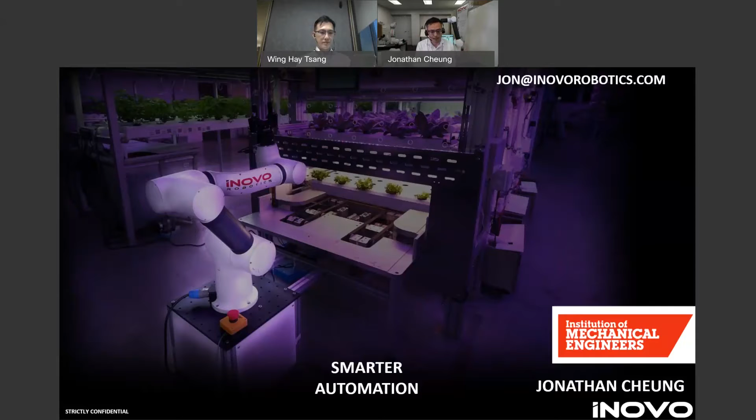But before we go into the details of Inovo, I'd like to share a little bit of my professional background and where it all began for me, to give you a bit of perspective on the Inovo journey and how we got to where we are now, and some of the exciting projects I've professionally been involved with.

To begin with, my professional background is as a mechanical engineer. I had my MEng in the UK, and I started my career in robotics in the UK for a commercial but defence organisation called QinetiQ. Right from my early career days, I've heavily been involved with automation systems, robotics, robot arms, manipulators, and remote control vehicles. So here you see some examples of some robotic and remote vehicles.

The one you see on the bottom right is a remotely operated JCB digger for unexploded bombs, effectively. And the image on the top right is a smaller bomb disposal research vehicle developed for the company, QinetiQ, which is a UK-based defence company.

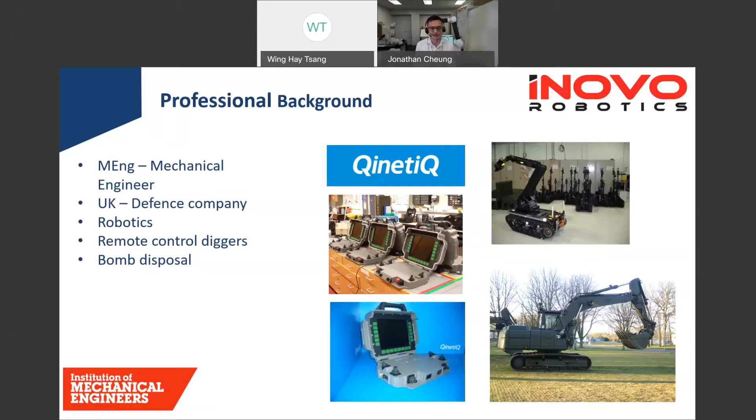And so that's really where professionally my career started, and moving on from robotics in bomb disposal, I spent a number of years working in transmissions, particularly in hybrid electric transmissions for tracked vehicles. So here you see on the right, a circa 30-ton military tracked vehicle, and I was involved in the development of the electric transmission of this for a number of years as well.

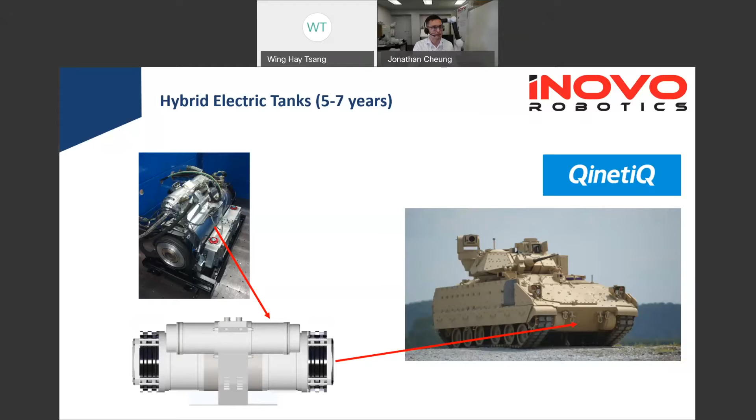In my early days prior to developing Innovo, so this was in my prior life, moving a little bit further on in my professional world, I did a number of projects for the Home Office, for Defence and National Security in the UK, where I developed a very novel scene management barrier. It's a police barrier, a foldable trailer, which can act as a police movable shield, and the video you see here is in the UK.

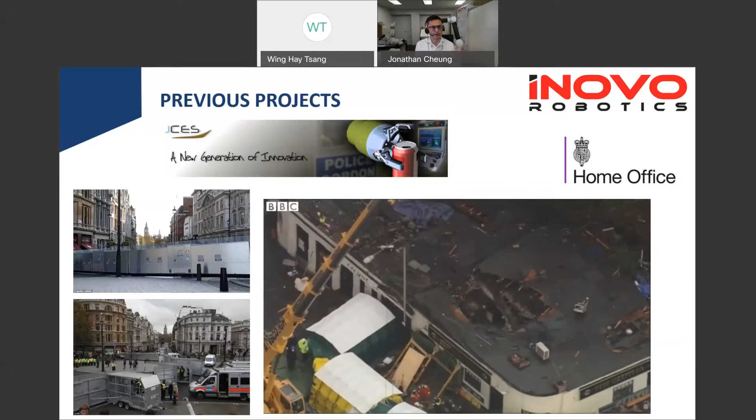It's actually in Glasgow, where a helicopter unfortunately crash landed on top of a building, and as you can see, there's a perimeter of police barriers to protect the site, to keep privacy in that environment. I'm very proud to have created a system which is being used so heavily and publicly in the security industry.

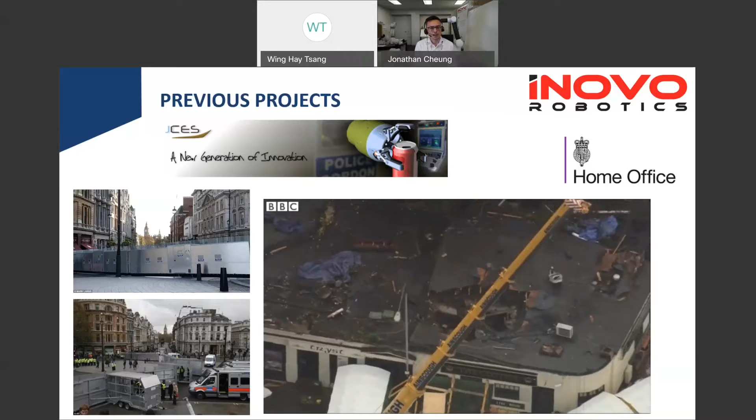So moving on into some later years within the robotics industry, one of my roles was as an engineering consultant for developing the UK's next generation bomb disposal vehicle. This is the vehicle currently being used in the UK by the UK police, and it is heavily used to protect lives, to defuse unwanted explosive ordnance effectively. So the kind of defense systems I've been involved with, and very proud to be involved with, are in the defense environment, and they actively save lives.

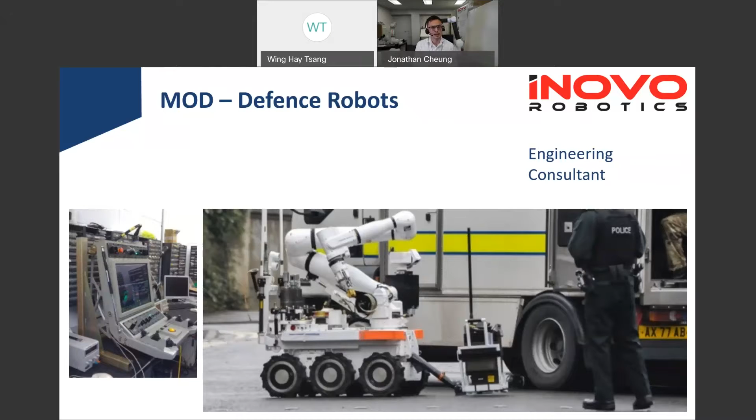So it was in this company that's actually the seedling of the idea of where Inovo would be born. This was the company in 2009 that I met my co-founder, Henry Wood, and we worked together very successfully in this company to deliver this very advanced, very state-of-the-art military vehicle to very exacting standards. And it is where we first worked together and first started solving real problems together.

Myself and my co-founder Henry, we embarked on some future projects together as consultants. So this very interesting project is actually a ground vehicle project.

It was effectively for the Ministry of Defence, but the aim was to create a fundamentally more explosive-proof vehicle. A big problem within the military is military vehicles have to withstand a lot of explosions and abuse, so what we did is we created a novel suspension system which would be fundamentally more robust from explosions than a conventional system.

So this is a very exciting project, and I'm playing a very short video now where this vehicle is being tested in a military site in the UK, and the test environment was very interesting.

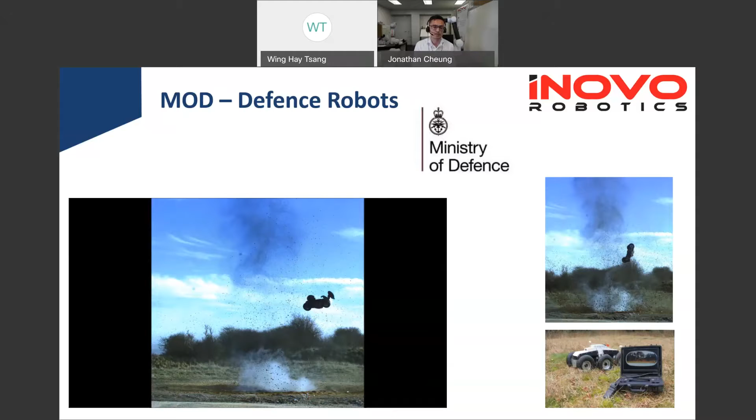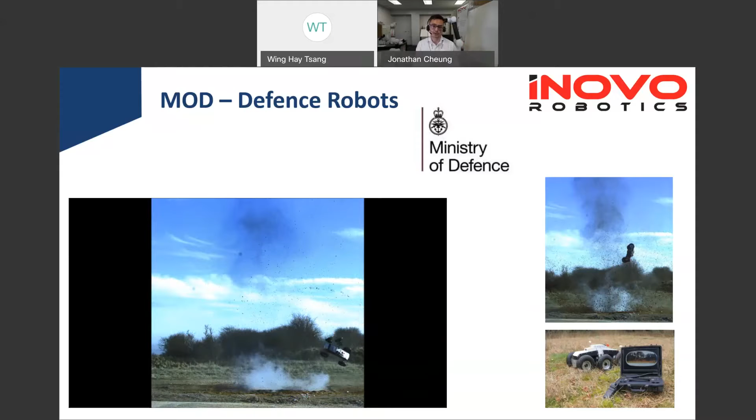We were required to progressively apply more and more explosions or explosives to it, to try to test and validate the increase in performance to the novel suspension system. This was a project funded by the Ministry of Defence as an R&D project, and was very rewarding.

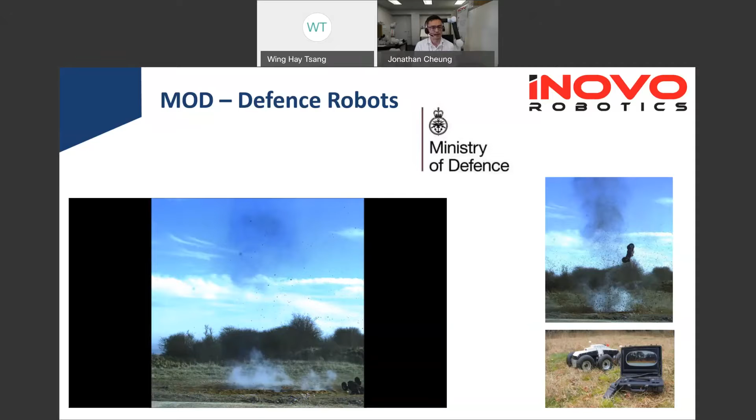After this project, we actually patented this novel suspension system, and we have maintained that patent. So that's a very brief background in terms of our journey before the start of Inovo. Inovo was born with myself and Henry Wood, my co-founder, with an image of him displayed there.

We decided that what we wanted to do is bring our level of expertise solving very novel, high-end problems, our engineering background, to solve a problem which was much more widely seen as an industrial problem, as opposed to purely within security or military, where we felt the market is quite contained or quite small in comparison. So in 2016 we started a new company called Inovo Robotics, and this is where our journey started.

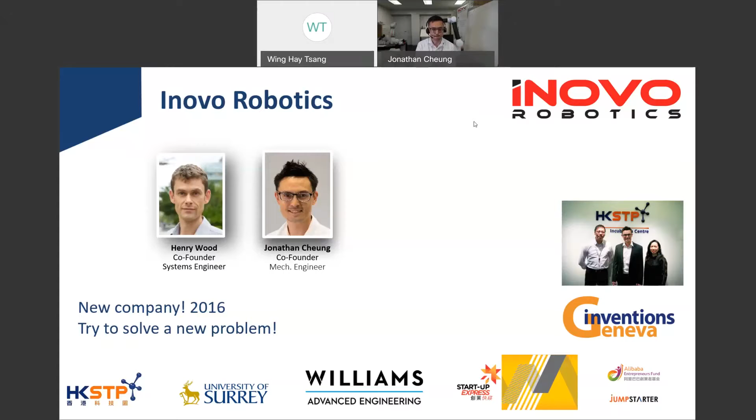I mentioned briefly about the market that Inovo is solving, and what we realized when we looked at the manufacturing market is it's incredibly manual. Every product that we make, at least somewhere down the line, there is somebody putting it together. Whether it be packaging, assembly, picking, loading CNC machines, or loading injection molding machines and hoppers, somewhere along the process there are lots and lots of people where there is a lot of inefficiency.

Globally, manufacturing as an industry probably accounts for 2 billion people, and the greatest problem within manufacturing is this huge dependency on labor. So what we are aiming to solve is to create an automation system which is smarter, more flexible, more adaptive, and affordable, to help lots of different businesses automate quicker and smarter. That is really where we pivoted our journey and took our step into Inovo Robotics.

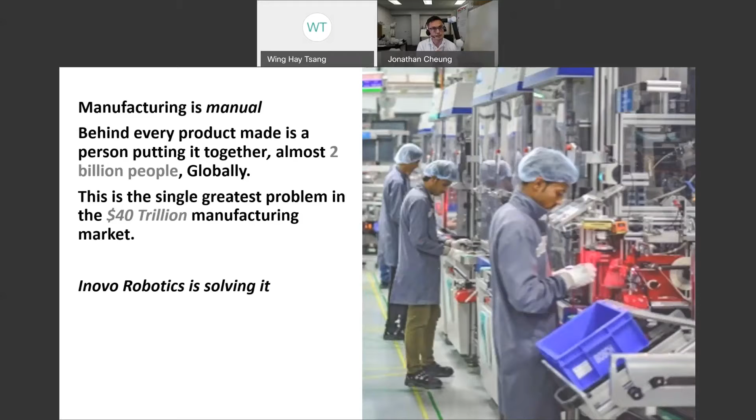Inovo Robotics was founded in 2016 in the UK and in Hong Kong. We took the very interesting step to start the company in two places, which is quite unconventional, and we did it for a number of reasons. Firstly, we're quite ambitious, and we wanted to maximize our opportunity in developing a company by looking at the best places that would give us the traction, the market opportunity, the supply chain management, and also the talent to build our business.

We decided that, because we have worked extensively together, we were able to manage an engineering team very well, and we have deep technical knowledge. My background is in mechanical engineering and product design and development manufacturing, and Henry's background is in electronics and software, so our skill sets complement each other very well.

We looked at the different regions and markets to evaluate where the pros and cons would be if we were to start a business, where in the world would be the most sensible place, and we settled upon UK and Hong Kong.

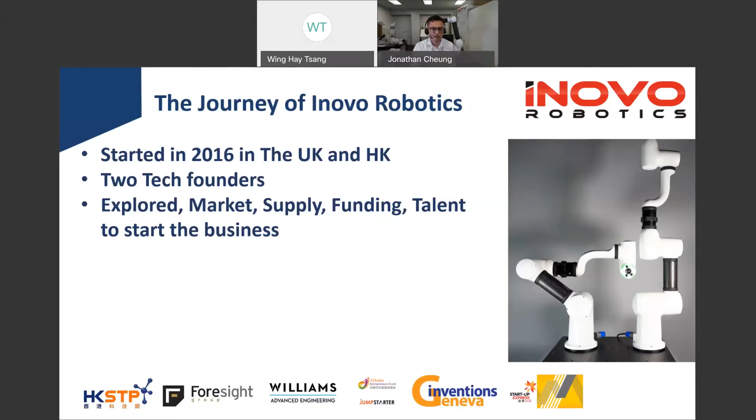So now I'm just going to jump into a short video to give a different starting flavor to what Inovo is about. So I hope this helps.

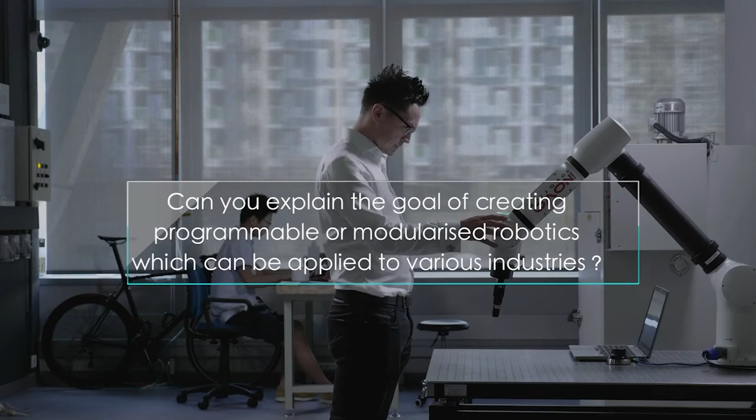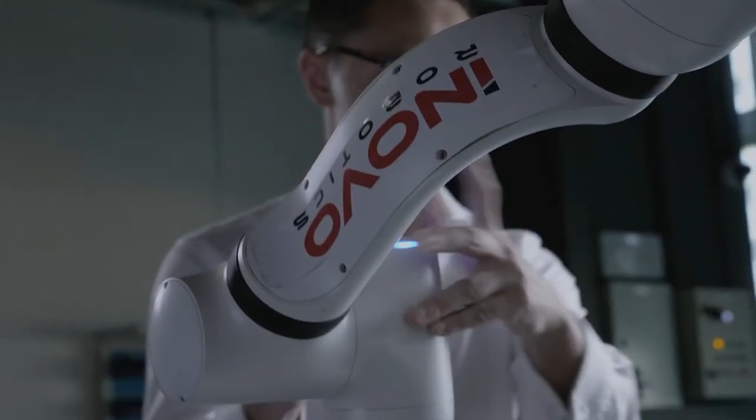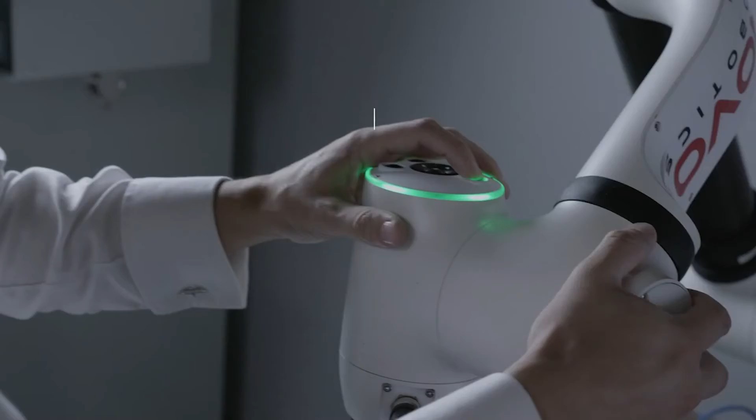The real goal of Inovo Robotics is to make democratized robotics, as we call it. What we're trying to do is give small to medium businesses across many different verticals the ability to automate and industrialize their everyday processes. Traditionally, big companies have been able to use robots and industrial automation, but small businesses have been unable to really benefit from it. So we want to create easy to use, flexible tools which will help them automate their everyday activities.

So the supply chain in the East, affordable low-cost manufacturing, being very close to our manufacturers helps us really manage the quality of our products, and to support our suppliers and subcontractors to get them to bring us exacting quality.

Exacting quality. So the market is the next area. Our market is really aimed at small to medium businesses where there is a high labor rate, but an obvious need to increase automation. Traditionally that has meant our market has been in high labor rate countries - Western Europe, the US, and also some Asian countries such as Japan and Korea. Those are the real countries we're targeting first.

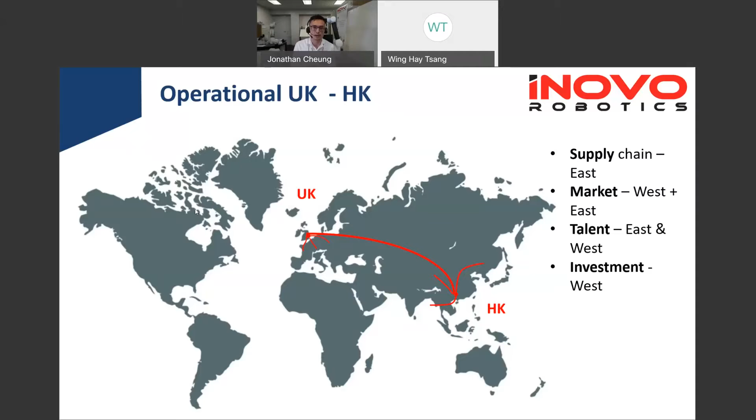So now I'd like to delve into a little bit of technical detail. Obviously this is an IMechE talk, and all our members are mechanical engineers, so I'd like to delve a bit more into the mechanical bits and pieces.

One area of real interest within the robotics part is the structural element. Robotics or manipulators are a quite specific type of structural problem - effectively we're always talking about cantilevers. These are cantilevered beams, and so our structures always need to be optimized for strength and stiffness.

The main reason, for obvious reasons, is that the more weight you have hanging out in the cantilever, the stronger your motors need to be further down the arm. So mass optimization is always a very important factor in robotics. The lighter and stiffer you can make a structure, the less power you'll use, and acceleration and deceleration times will also be increased, and stopping distances decreased. So there's always a real drive to increase stiffness, reduce weight, and carbon fibers are always a preferred material.

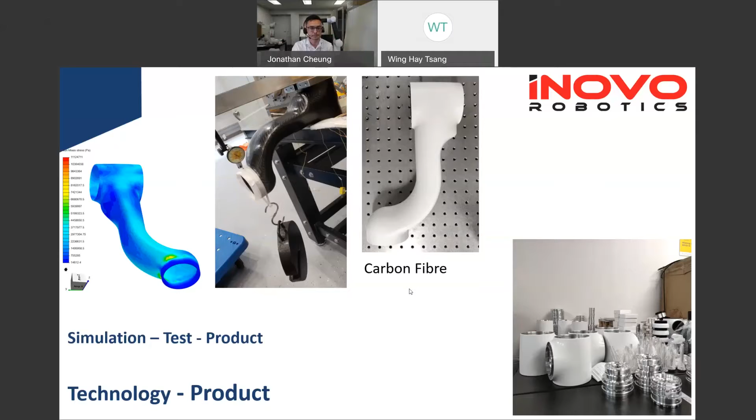So as a very brief example, on the bottom right, we have some machine parts - lots of different machine parts and also some castings. So we have our casting suppliers, our CNC, our lathe suppliers, and lots of different manufacturing methods that we use within the product. So those are the piece parts.

There's also within our team, within Innovo, we have a number of patents. We obviously have a modular robotic system, which I'll demonstrate in a little while. But what we have is a number of different mechanical physical patents.

The first patent that we have is within our coupling mechanism. So we've created a modular system where we are unwilling to compromise on the stiffness, the rigidity, and the repeatability that is required within an industrial automation system. This level of performance is not available within any commercially available coupling mechanisms, so we've created our own.

It's a quick connect coupling which enables us to have extreme amounts of rigidity, repeatability, but also to maintain the level of performance that is required in an industrial robot.

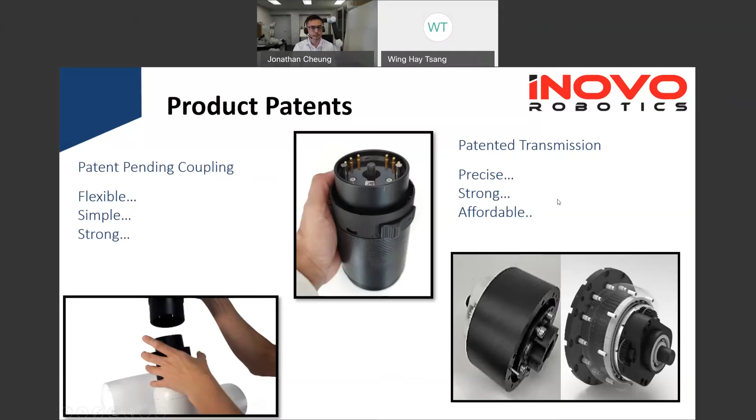From a collaboration point of view, from the UK and in Hong Kong, our company has extremely deep levels of technical knowledge and capability in all areas of engineering. We develop our own motors, we develop our own drivers, we develop all our own embedded software for the controllers. We also do a high-level software, which is our graphical user interface, and we also develop almost all of our piece parts ourselves.

So we have a very deep technical knowledge in a lot of different areas, and we've also spent a lot of time with our suppliers in China and also the whole of South Asia region, where we've worked very closely with them in order to optimize our system, to get the level of performance that we require, the level of fundamental cost, and the level of control over our quality. It's really important, when developing a very sophisticated product like this, to have very good fundamental controls over your core elements, meaning you have a deep understanding and are able to optimize and get the best product, which is one of Innovo's greatest strengths.

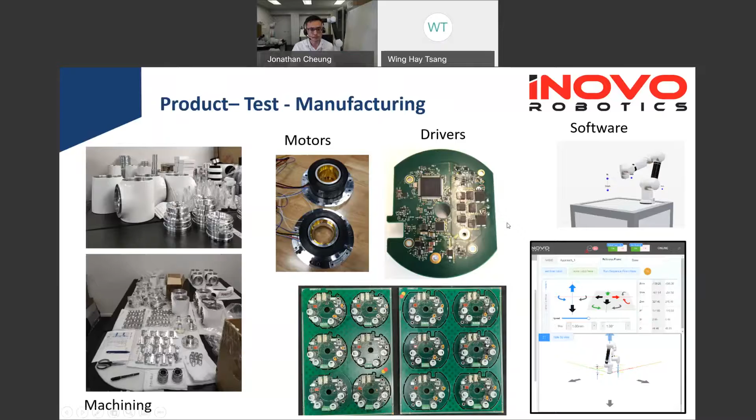Now I'd like to briefly show another short video. This video explains really how the system can be used and why we have a different level of flexibility and automation compared to other robotic systems that you would see.

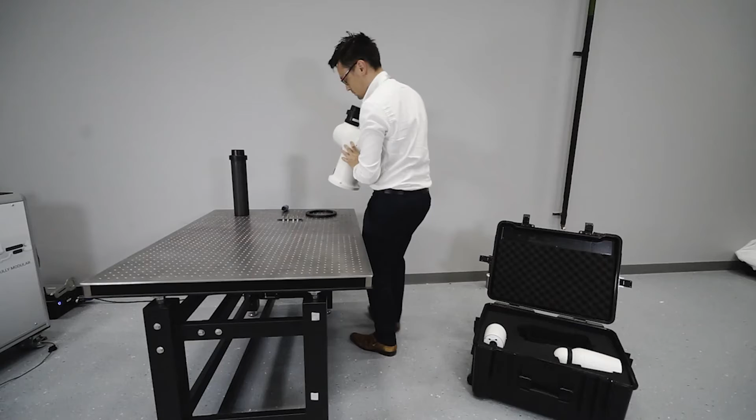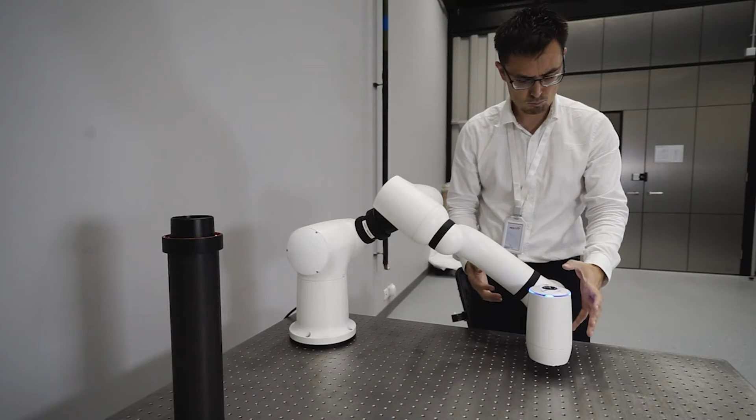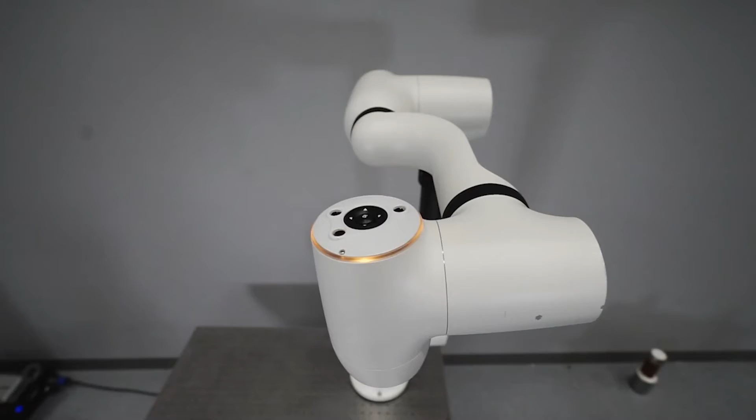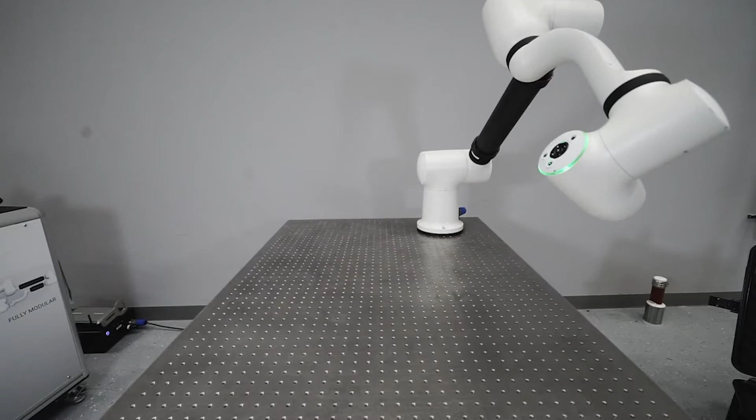So what you see here is teach and repeat, and we have a very simple to use teach and repeat system. But when the requirements change and the system requires a greater reach or a change in payload, our modular system is able to be flexible enough to adapt to all different types of automation environments. So the user and customers are no longer constrained to a certain size. They're not bound by a certain way of doing something. We have the most flexible tool in the market.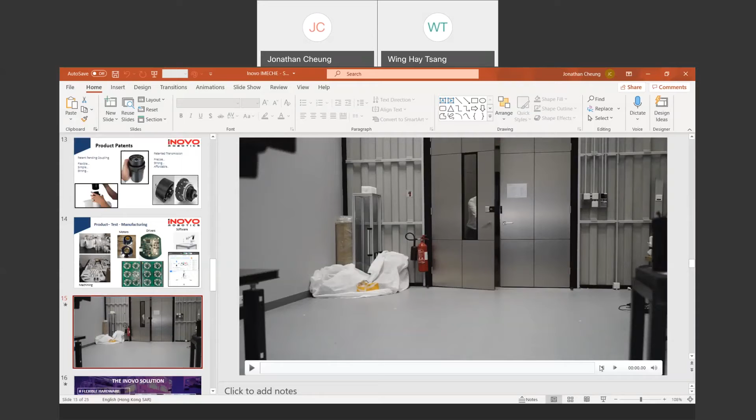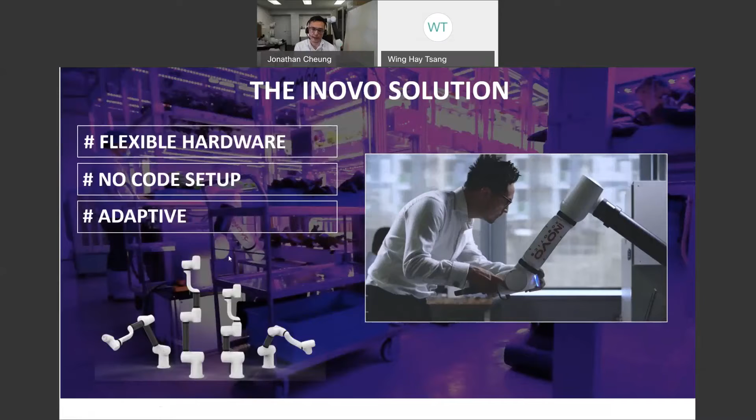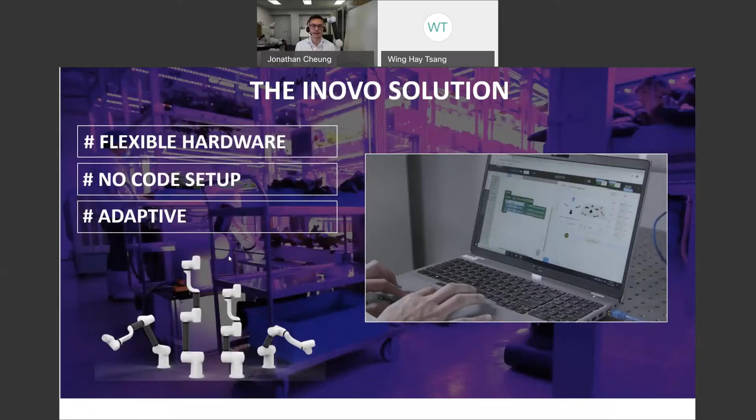So, yeah, so the Inovo solution. What we have is flexible hardware. Our software is no-code, so we use a very simple user interface, which I'll briefly show at the end, and it's extremely adaptive. What that means is we bring a tool like no other to the market.

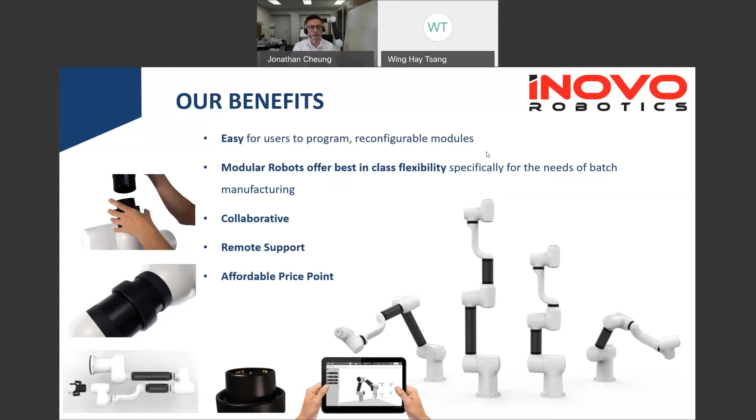So our benefits: we're very easy to use, completely flexible. We're a collaborative robot, meaning they're safe to work around people. This is very different from an industrial robot, where if a person was operating near it and got hit, the robot would never slow down or detect that person was there. Our robot works as a collaborative tool around people, so it's safe, extremely flexible, and extremely easy to use. These are our main advantages.

So how does modularity really compare to other systems? If you take this case example on screen, we have our robot on the left with 3 different configurations labeled 10 kilos, 5 kilos, and 3 kilos. That is all one robot. We change the link sections and lengths to get that level of reach and payload trade-off that would normally be seen across 3 different robots.

So what we say to customers worried about exactly which system to use, or which robot will be most reusable once a batch production run is complete, is: give yourself the most flexibility, because you don't know what project will come later, in 6 months or a few months time. You don't necessarily need to buy automation just for this project, but invest in automation because your automation is the future. That's really how we try to position our product.

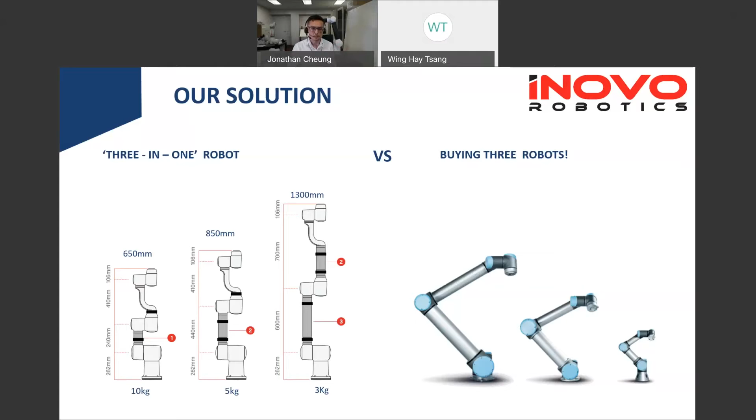So the title of this webinar is Smarter Automation. We have a lot of technology already in our product, but we're also bringing a step improvement to the platform as well. So we very much see our product as a platform product.

We have lots of different interfaces, and we can connect to our system in many different ways. We can use third-party tools, sensors, components. We have a very open architecture from a software and electrical point of view, and so we see our offering as something that can automate today, but also take our customers on an automation journey where they're able to add value later and automate more and different things.

One thing we're developing in the background now is our connected system. All our robots can be connected remotely, so given the right permissions, we can access any robot in the world with a 4G or 5G connection. That means we can remotely log in to do maintenance, predictive maintenance, and adaptive support, seeing where there will be problems and using that data to help improve or optimize processes. We very much see this as a platform of the future.

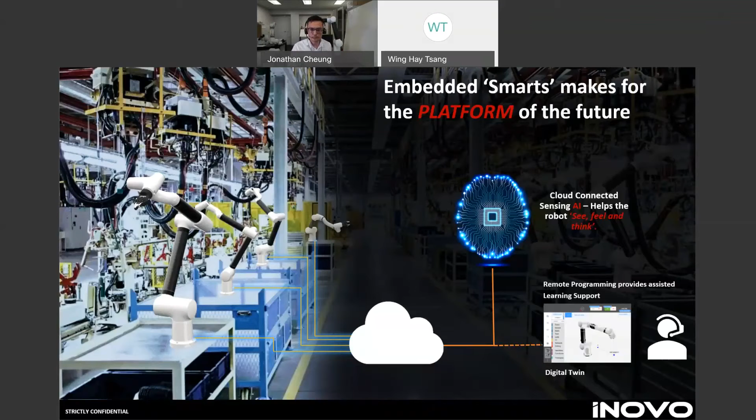Our company, as I've said, is 4 to 5 years old, 4.5 years old. We have many different applications within the pipeline of our business. Because of our flexibility and smart connections, we have lots of different industries asking us to help them automate. So here are a few examples of our applications.

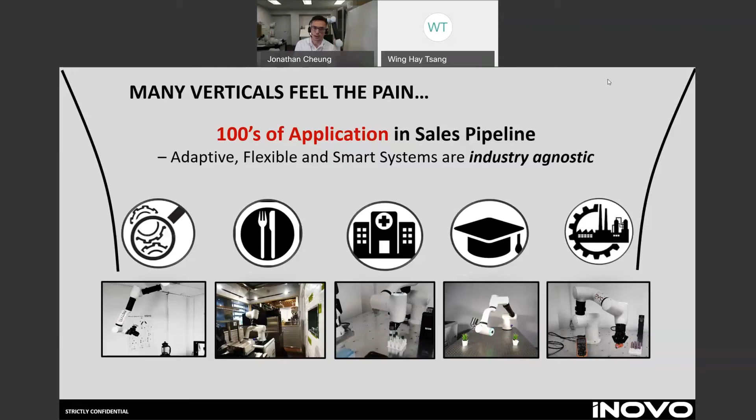On the left we have some vision systems, and we're working with a company in Sweden on a photogrammetry system. We already have our system within a restaurant right here in Hong Kong. We're also working on sample inspection and sample taking of COVID-19 samples, as well as a number of other applications within education, testing, and food processing. Lots of different applications.

Here's an interesting one we're working on alongside Williams Advanced Engineering, for battery testing for an EV vehicle. One thing you really don't want to get wrong is putting a bad cell into a battery pack, so the most reliable way of doing that is to generate an automation system to handle it. We've supported Williams Advanced Engineering to do exactly that.

We've sped up a short video here showing us picking up battery cells, putting them into a little tester, validating that it's okay with separate systems, and then placing them back in. This is a short example of where monotonous, repetitive tasks can be easily automated. This level of programming was done in under 20 minutes, and these battery builds could go on for 24 hours a day.

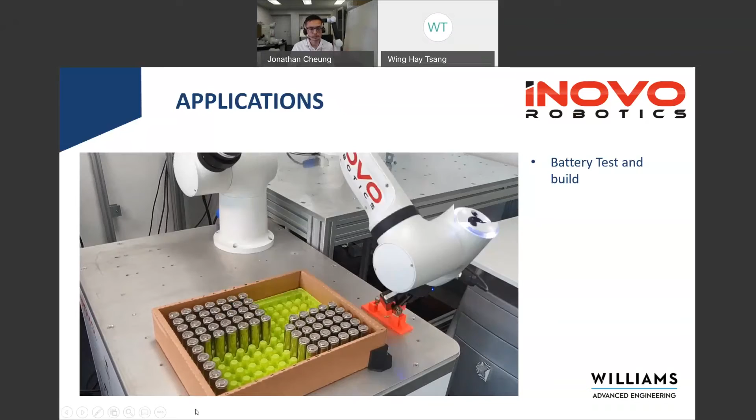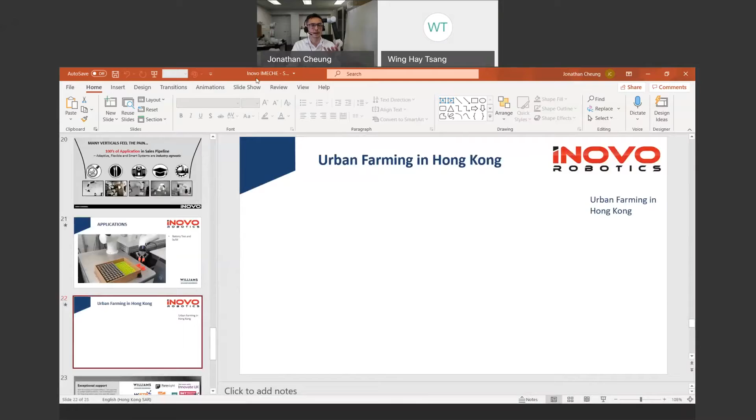So I'm just going to jump into another very short video. This is another application where we have an application within Hong Kong, so it's of interest, and this is a demonstration that we've carried out in an urban farm within Hong Kong.

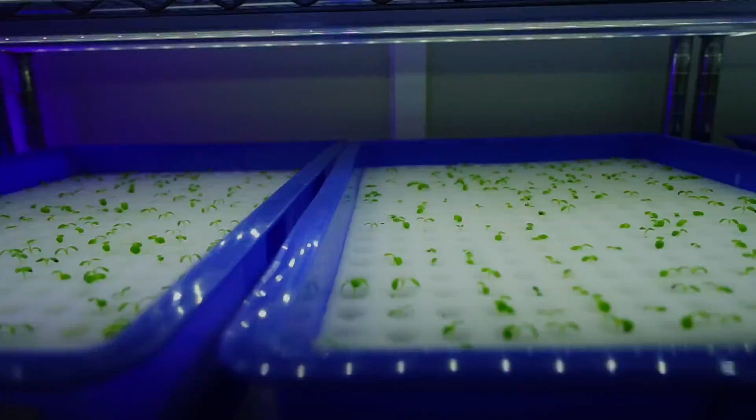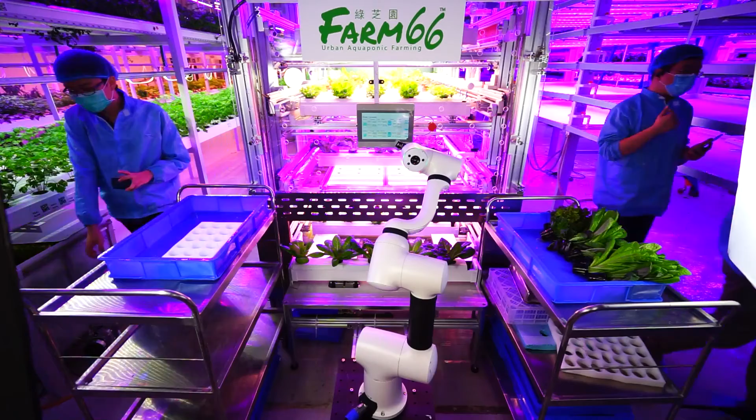This is one of the most advanced urban farms that I know of, and they are pushing the boundaries of urban farming. We're supporting them with our robotic system, which is super flexible and can do many different tasks to help automate and optimize food production. What you see here is our robot system loading salad seedlings into an urban farm, and on the right it takes out those salads and harvests them after they've grown for 28 days, I believe.

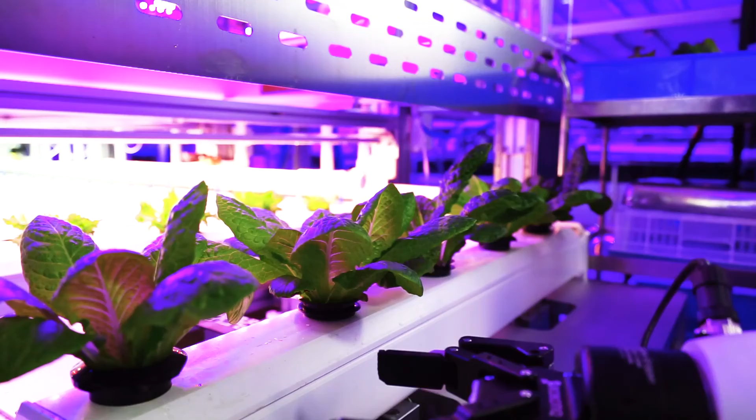This is an example where we have an extremely flexible system, and we're able to come in and fill the gap between manual labour and automation systems to increase efficiency and productivity.

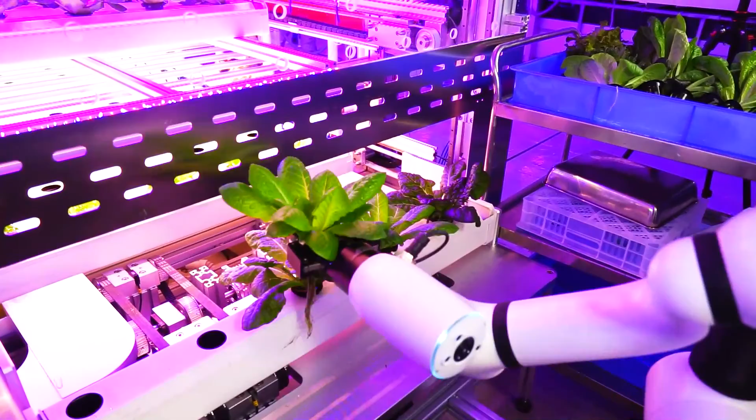So here you see some of the outputs of the salads, which I highly recommend. They're available in Pacific Coffee, Coffee Academics, City Super. They are very good organic salads, and I recommend them.

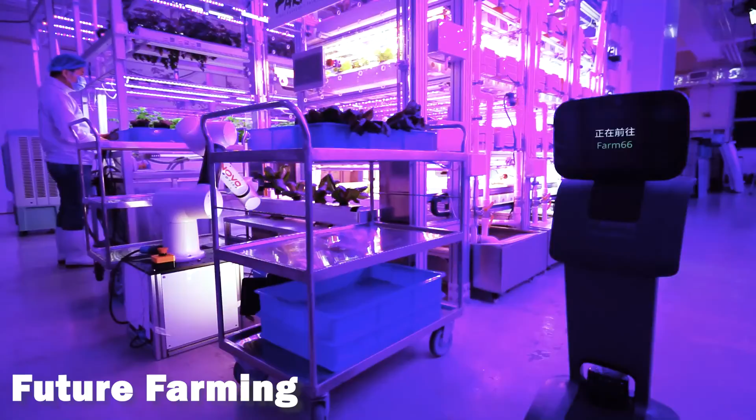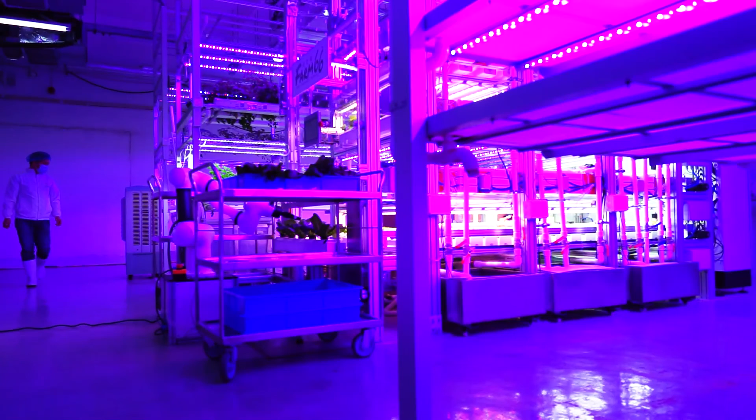The advantage of robotics and automation is that you are able to operate 24 hours a day and keep the productivity going, and that's where the advantages lie. The company is called Farm 66.

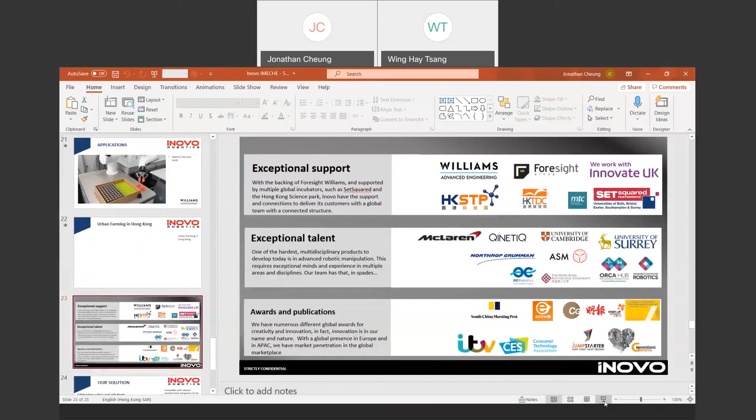I mentioned earlier how I was going to talk a little bit about talent within our company, within the UK and Hong Kong. It's something that I'm very proud of, the team that we've created here. We have exceptional talent, and you'll see very familiar names in these boxes, where you have McLaren and ASM, which is much more familiar within Hong Kong.

We also have Cambridge. We have Williams, the Formula One team, who are our backers, and so we have a very deep level of technical capability. You really need it for such a complex system where you have to integrate very complex areas of engineering very tightly, from structural performance to control systems to high-end user interfaces.

To productionization - there are lots of different facets within the robot arm, which makes the product very multidisciplinary. The one thing I've always experienced in robotics is that if you don't perform well in any of those areas, it really shows, because a good robot system has to combine all those elements in a very good way.

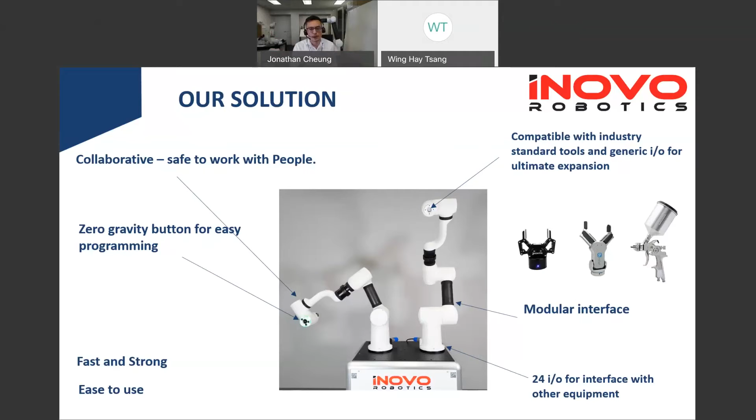That's enough of me speaking. Now what I'd like to do is give a brief demonstration of our robot system, and then we'll open the floor to questions. I think the next thing is I'll do a small demonstration of a robot system behind me.

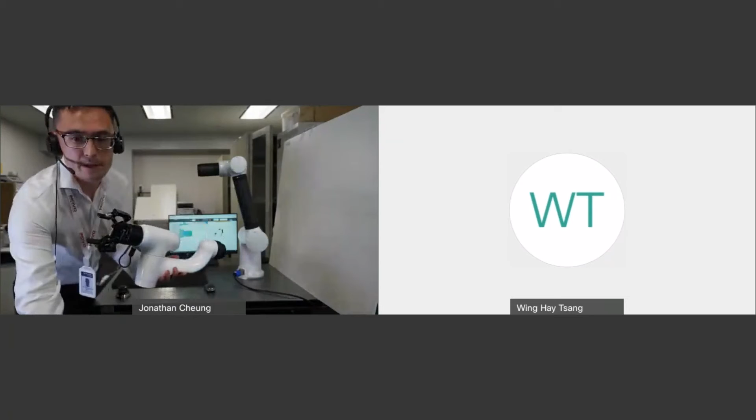So I hope everyone can see, at least see a little bit of what's going on. What I have here is a part of the robot arm.

This is the carbon fiber element that I mentioned before, and what we have here is part of our module. We have two joints within here, and we break down our joints into basically joints of pairs. So this is what we call our joint 5 and 6. Our joints 3 and 4 are here, and 1 and 2 are here.

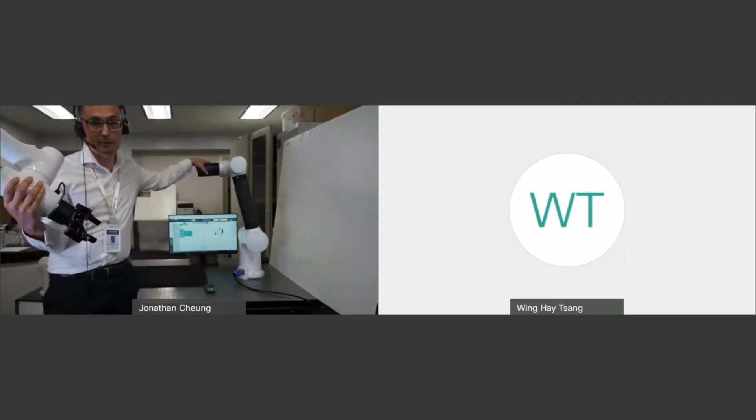What you see is they are separated with these black elements, which are our flexible link tubes or stiff link tubes, of varying lengths. What I'm going to do is just show how everything goes together. I've got just a small link tube section here because I've chosen to have a medium tube here, and I'll have a small link tube here.

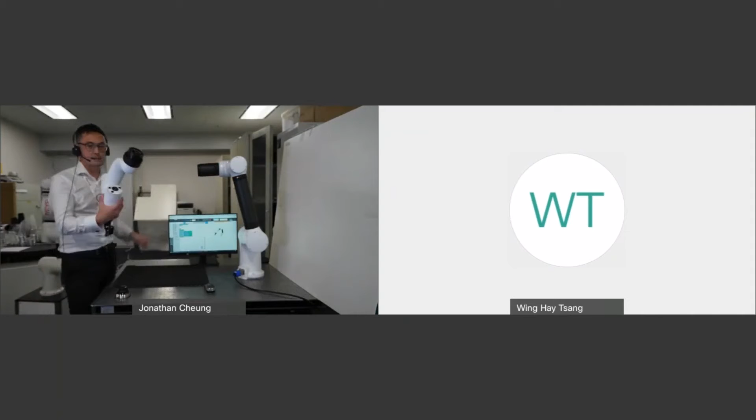So I've already set that up. All I'm going to do is take that link section, and all we need to do really is put it into position, and then move the flexible coupling element.

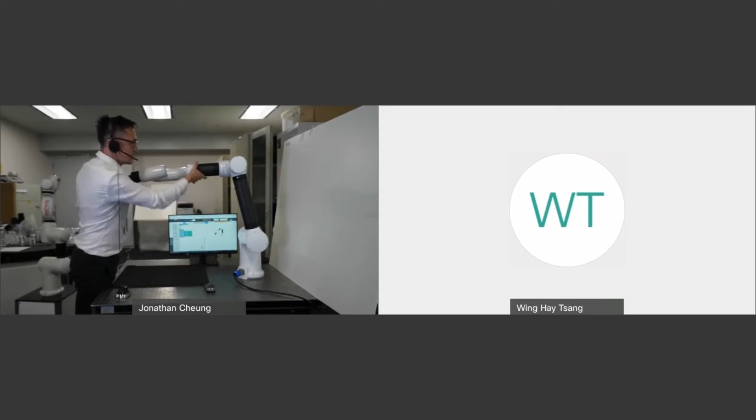We have this locking collar arrangement, which is one of our patented elements. So what you have here is a lock system. Now we've got a latch here, which means it won't undo, which is obviously very important to not have to worry about it coming loose.

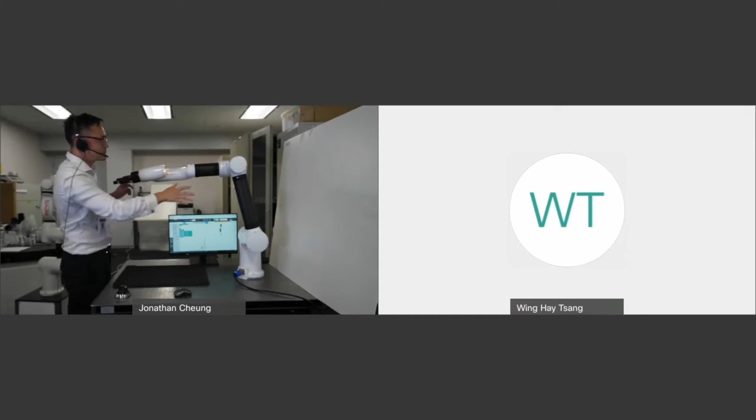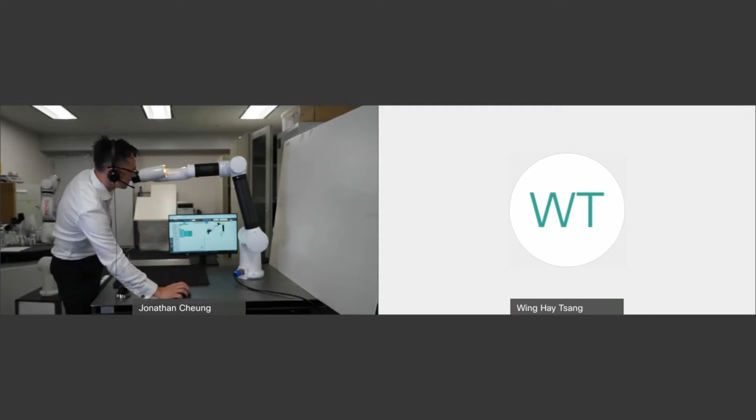I'll just press the power button again. So what happens now is the yellow light is flashing, so this is now picking out the configuration. It's very difficult to see here, and I must apologize on the display, but as you can see, the user interface will automatically update.

So what that means is our system knows what configuration it's in. It's plug and play. We don't need to calibrate. It's all pre-calibrated. Everything is plug and play, like Lego blocks. And then what we would do is enable the system, and now the system has gone green, and the system's ready to go.

So the system is ready to go, and there's a few things that we do in order to make it really good and simple to use for our users. One of the ways is to really allow our users to operate it and use it in a really intuitive, flexible way.

So the first way that we do that is we have what we call a zero gravity button. We'll press this button - notice this has gone blue - and we can just move the arm around as if it's in zero gravity. So what we do is move that to a position.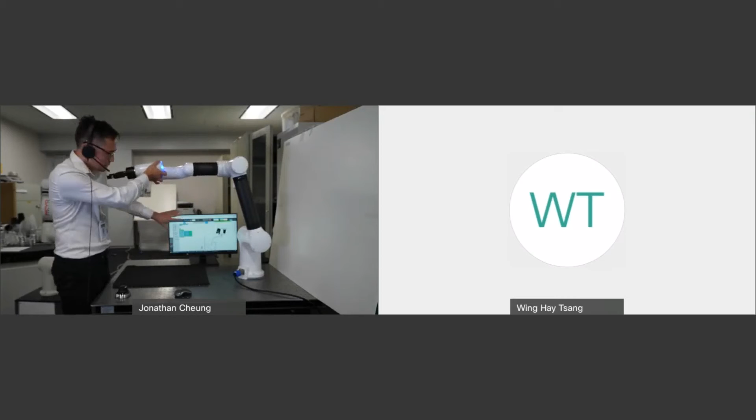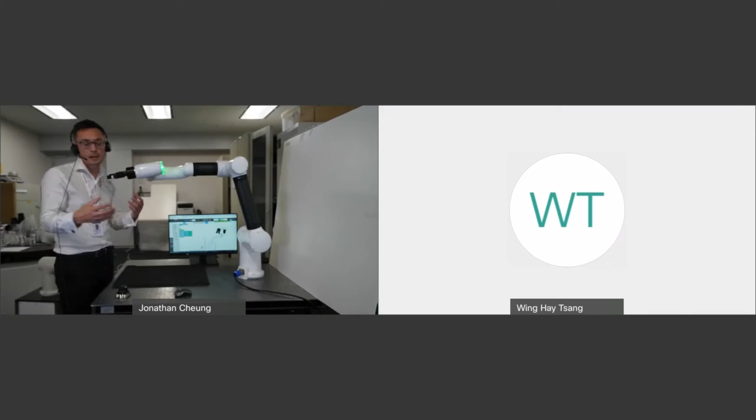We'd record certain positions, and then in our flow diagram user interface, we would just record those steps. So it's as simple as move it here, record, move it here, record, and then we build on that program. We elaborate it however much is possible using logic, and very simply you're able to build up automation systems.

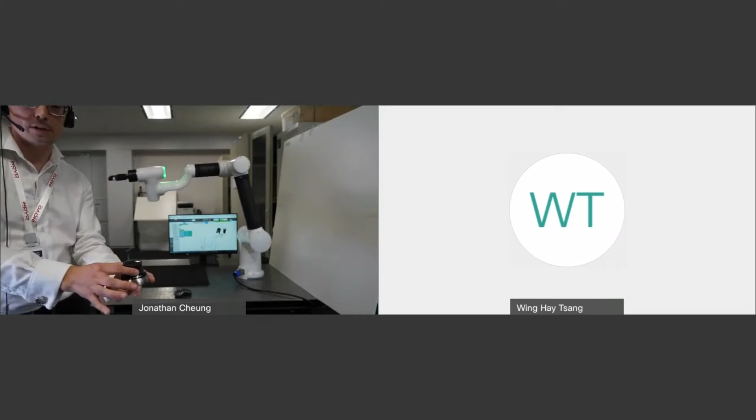A few other things that we do - we have a room full of mechanical engineers, and mechanical engineers may know what a 3D space mouse is. So we actually configure our robot to a space mouse, so we can control it using the 6 degrees of freedom on a space mouse, which is quite intuitive for mechanical engineers, we found.

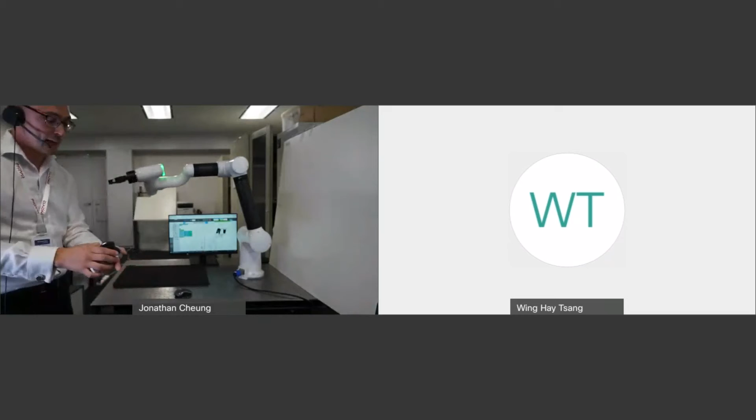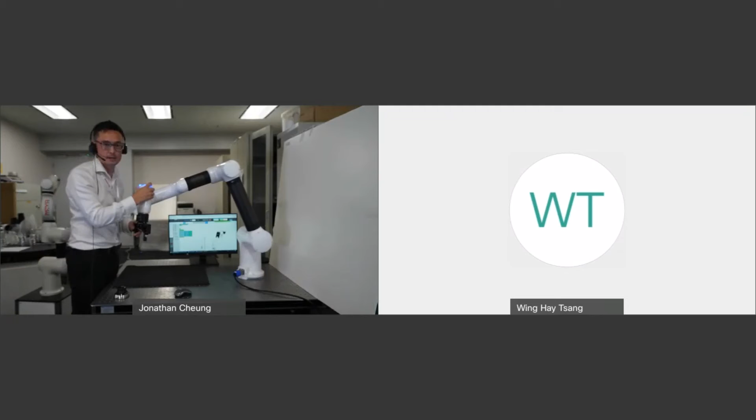But it does definitely take some practice. We find that the easiest way to be able to command the robot to do what you want is to press the button and move it around and really command it. But we're also always exploring different ways in which we can improve the usability, the user experience, in order to keep to our philosophy of smarter and easy automation.

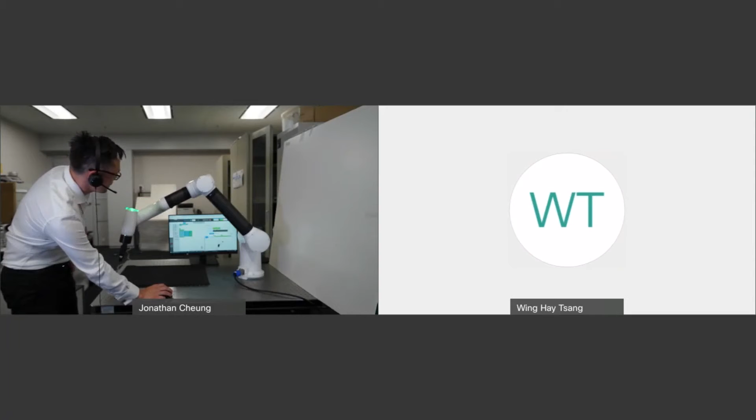So what I've got now is just a few waypoints which are already programmed. We call them points, and we will just record a certain few points, and I will test it first. So I have 4 points here - that's point number 1, point number 2, I'll move the robot here, which is pre-programmed. Then the third point that I've recorded is a little bit further away, and then the fourth one is here. So I've just quickly set these 4 positions.

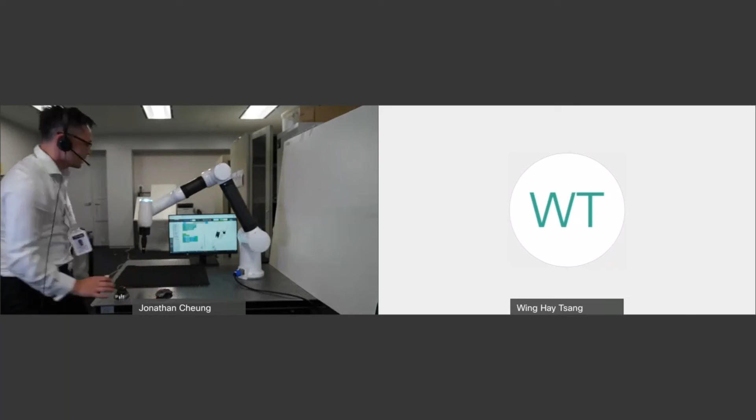And what I have is a repeat function here. So now I've tested those 4 points, I will press play on that. And so now the robot system is running through that program in a forever loop, or until it gets an interrupt through any of our I/O. So what we have is a way to flexibly automate very quickly in a safe way.

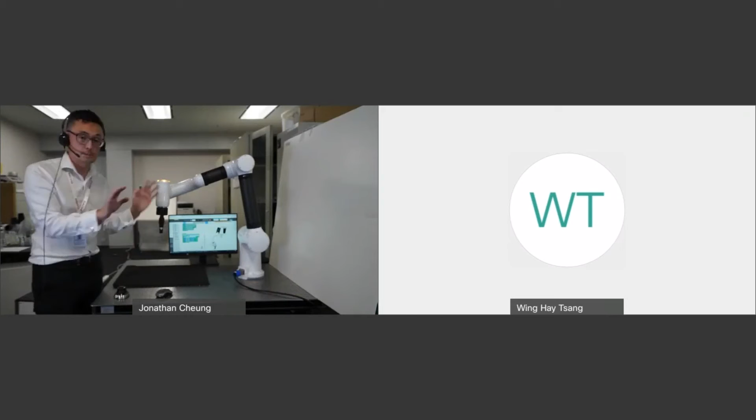So what I've done there is I've touched it. It's sensed that it's doing something a little bit that it shouldn't be doing - it's drawing a little bit too much current. So it said, oh, I'm too close to a person, I'm too close to an object, and it will stop and it will be safe.

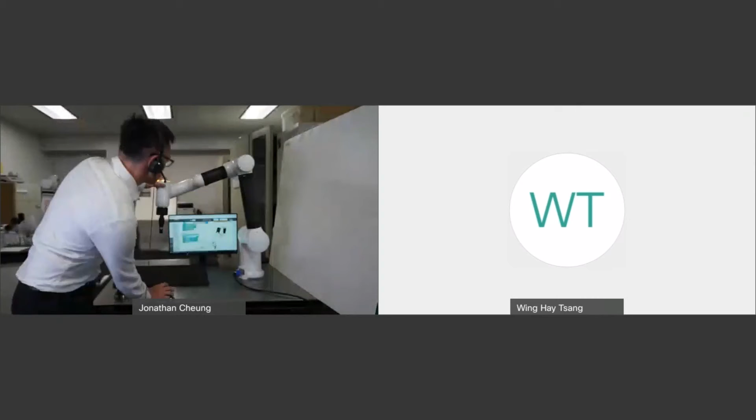So that really concludes this short demo. I don't want to take too much time, but I'm very happy to answer any questions that anyone may have.